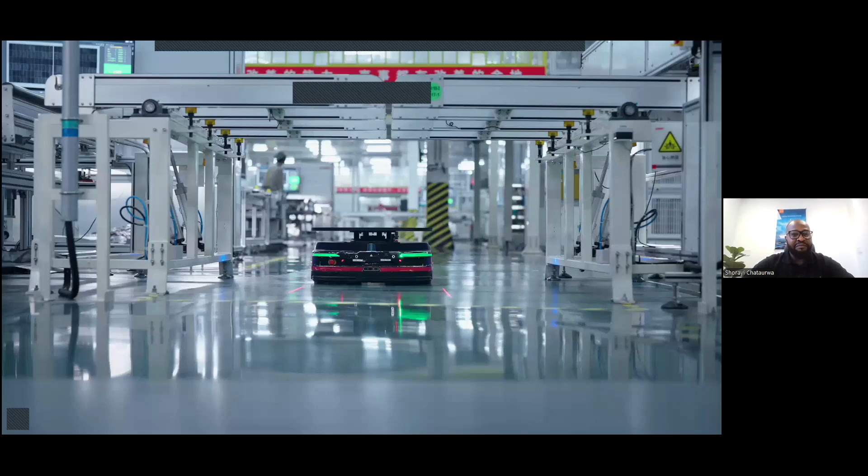Then the third one is one of our flagship technologies: we introduced what we call the TaiRay wafer. Now we're going deeper into the technical and technology development which we have deployed from the LONGi side. So the TaiRay wafer is a silicon wafer which we have developed throughout the last 10 years, and it has a lot of advantages. That is better matching.

I'm going to explain further. Then also high concentration, I'll explain. Then also lower impurities and more impact resistance. So let's dive into better matching. So better matching is actually just the cell adopting the optimum resistance.

That is the material which actually made the cell itself. So if you look at the graph which I've put in front of you, you can see the comparison between the conventional wafer and also the TaiRay wafer. So it does have a better matching of bulk resistance compared to the conventional.

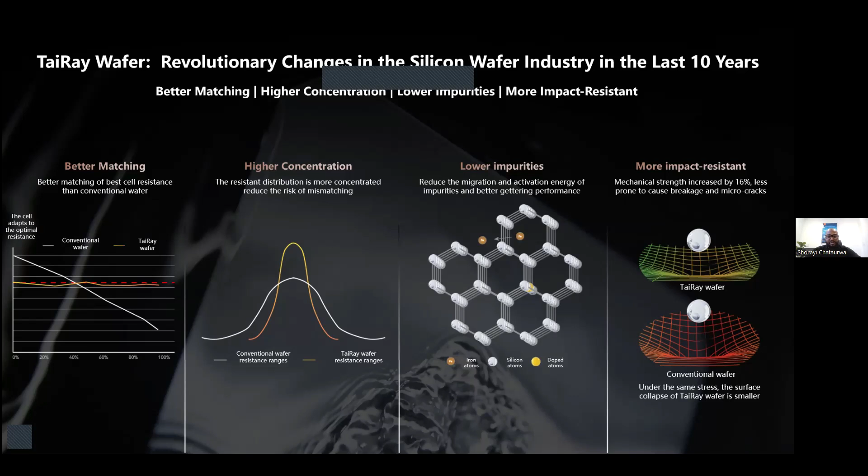Then with regards to the low impurities, during the manufacturing, we actually looked at the doped atoms and also silicon atoms, then also the iron atoms. So we gelled together to make sure that we reduce the migration and activation energy of impurities and better gettering performance of the cell itself.

Then the last one, which is very important, is more impact resistance. Actually, we strengthened the wafer. So our wafer is stronger. It actually increases mechanical strength by 16%, which is less prone to cause breakages and also micro cracks during transportation, during installation, and also during just merely handling of modules.

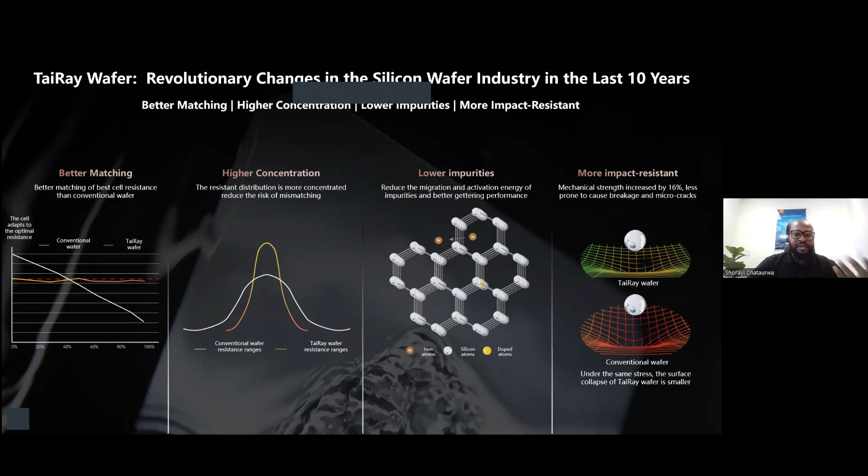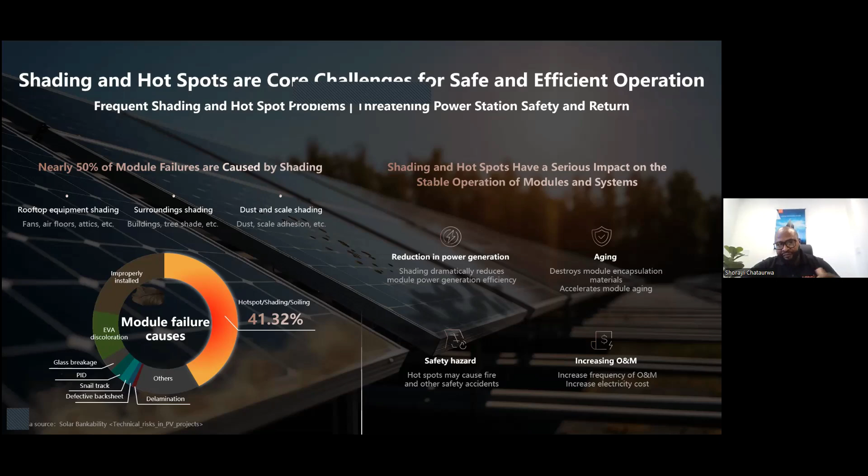So we looked at the frequency of shading and hotspot problems, which actually threaten power station safety and return on investment. During our research, we found out that nearly 50% of module failures are caused by shading. So shading can be from rooftop equipment, that is your fans and also air floors and attics, etc. Then the second one, surrounding shading, which is your buildings, your tree shading, etc. Then we have dust and also scale shading, which is dust and, for example, soiling.

So after we looked at that, then we looked at the distribution in terms of module failure cause. You find out that the large chunk of the problems is hotspots, shading and soiling of the modules. So we came and said, okay, let's look at it. Then we also looked at other parameters, for example, your delamination, your defective backsheet, snail trails, PID, glass, and also EVA discoloration. And we also looked beyond at other impacts, like, for example, improperly installed modules.

So after putting everything together, that's where we came up with the solution, and we came up with a product, that is your Hi-MO X10, which can solve all these issues, which does have an advantage over most of the products you find on the market at present.

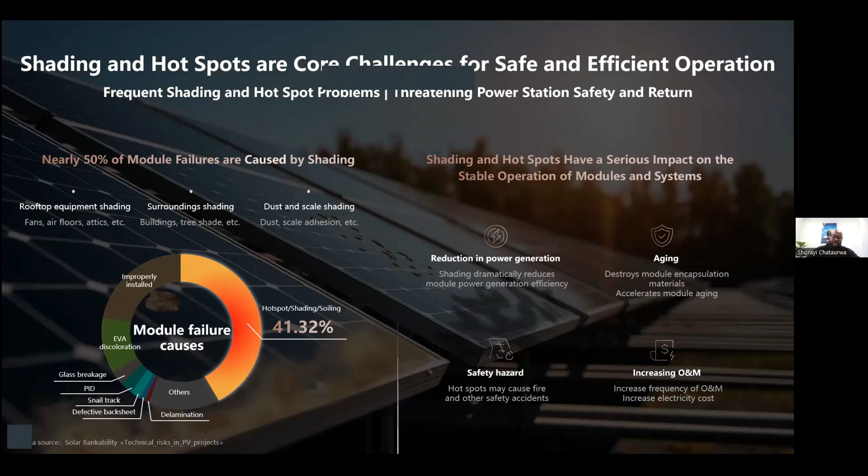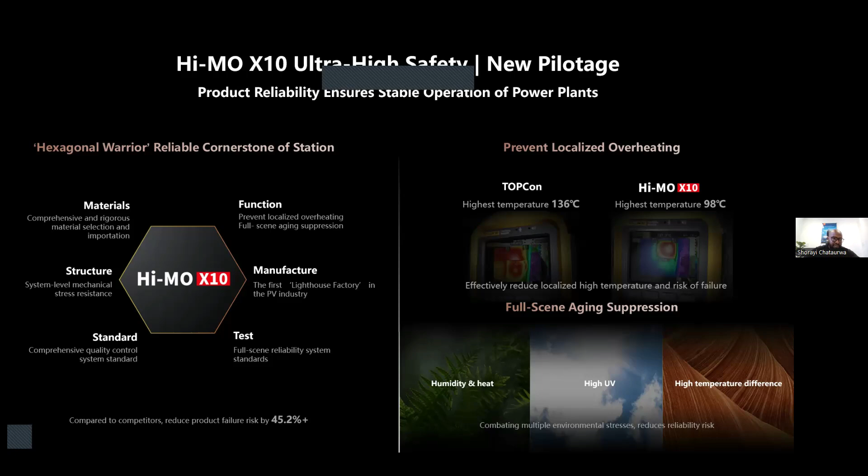So Hi-MO X10, let's look at the safety of it, as ultra high. Yeah, so as I just mentioned, why we came up with the product and the advantages of this product. So I've got the cornerstone, what we've looked at as the hexagonal warrior in the industry as the Hi-MO X10. So we looked at the material. I just spoke about this briefly. We looked at the material that we have deployed in the product, that is a comprehensive and rigorous material selection and importation. Then we looked at also the structure of the cell and the structure of the module as well,

complying with the system level mechanical stress resistance and the standard, which is comprehensive quality control system standard. Then in terms of functionality, I've got two items, which are very important for this product, that is preventing localized overheating. Then the second one is full scene aging suppression, which I'm going to also talk about. And manufacturing also, I've spoken about the Lighthouse factory, which is incorporated with AI to avoid human error. Then the last one is the test. So we actually deploy a full scene reliability system, standard testing.

So if you compare now these two competitors, you can see that we have reduced failure risk by 45.2% when we introduced the Hi-MO X10. So I've put some scenario on your right screen, that is preventing localized overheating, because I know people will have some questions on that. So we did a comparison with TOPCon using thermal imaging. So you can see we've got the highest temperature of 136 degrees. That is when the module is in operation. And if you look at the Hi-MO X10, the highest temperature could reach around 98 degrees Celsius. So this effectively reduced the localization of high temperature and the risk of failure.

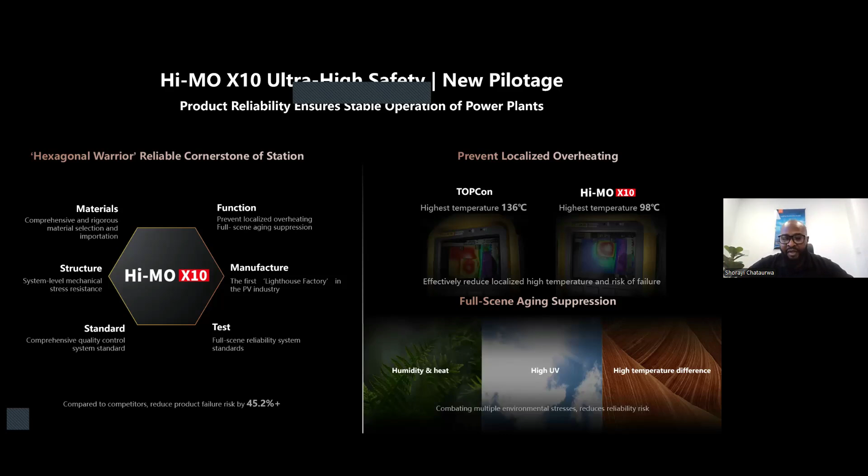Then the second one on the function, that is your full scene aging suppression. So our module, the Hi-MO X10, can actually withstand scenarios whereby you have humidity and heat. Some call it anti-humidity and heat products, and also we have high UV, so the module can actually resist an ultraviolet environment and also high temperature difference. So this actually combats the multiple environment stresses, which reduces the reliability risk on your plant or on your system.

Okay, some people ask me, what is this HPBC 2.0? So HPBC 2.0 stands for hybrid passivation back contact 2.0. The previous product we had was HPBC 1.0, which was made of a P-type cell. But now HPBC 2.0 is made of N-type wafer with the core of the TaiRay wafer. So this makes three key technologies. That is your BC platform plus bipolar hybrid passivation. I know many people are going to ask about bipolar hybrid passivation. I'm going to try to explain it in a nutshell. Then also we have the TaiRay wafer core. I deliberately started with the TaiRay core because it forms the core of the product. And we have also what we call the zero BB structure.

So in terms of these three leaps, we have the leap of cell technology barrier. So we upgraded the three-layer structure of the light absorption and also improved the photovoltaic conversion, then also electric transmission when we moved the bus bar to the back contact, and we leave the front exposed for high absorption of light. Then we've got also the leap of silicon substrate limitation. This is where we equipped with the TaiRay wafer core, which gives an enhancement of overall power generation potential and reliability.

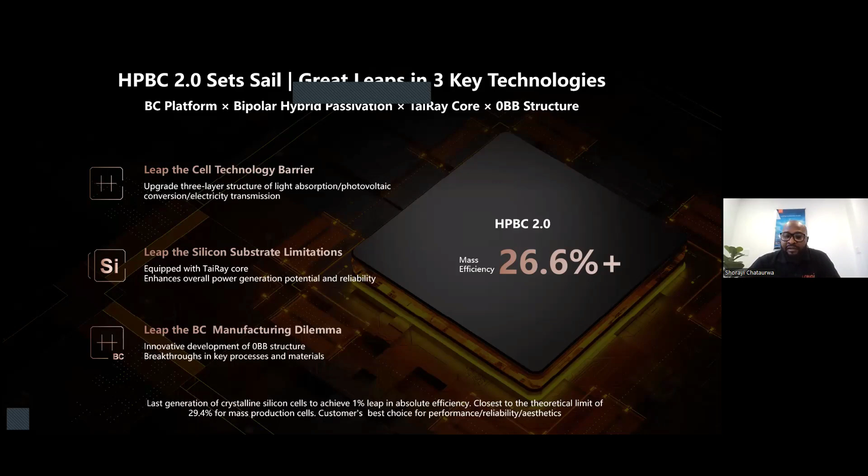That is your last generation of crystalline silicon cell to achieve 1% leap in absolute efficiency. It's actually closest to the theoretical limit of 29.4 for mass production cell. So I think this is just a good choice for the customer, best choice for performance, reliability, and also aesthetics. Because if you look at our product in terms of the looks, it looks beautiful. It's aesthetically pleasing.

Then the next section, I'm just going to try to break it down a little bit in terms of the self-developed bipolar hybrid passivation. So when we introduced the hybrid passivation, actually we've seen a boost of VOC, and also uniform passivation actually reduces aging risk, which I also mentioned in my previous slide.

So bipolar, it comes from the busbar. So when we moved the busbar connection from the front to the back of the cell, we have the positive electrodes, then we have also the negative electrodes. So the previous modules, we used to have one passivation layer on one electrode. So now what we have done, we've introduced a double. So for the positive and negative, we've introduced passivation on both.

So when we did an experiment, we found out that the passivation uniformity is 2% ahead of the mainstream product, which is actually effective against the UV for the cells. Then we have also the advantage that the passivation also reduces current loss at both positive and negative electrodes. So by placing both, that's where the name came as bipolar. So bipolar hybrid passivation, that's where it came from.

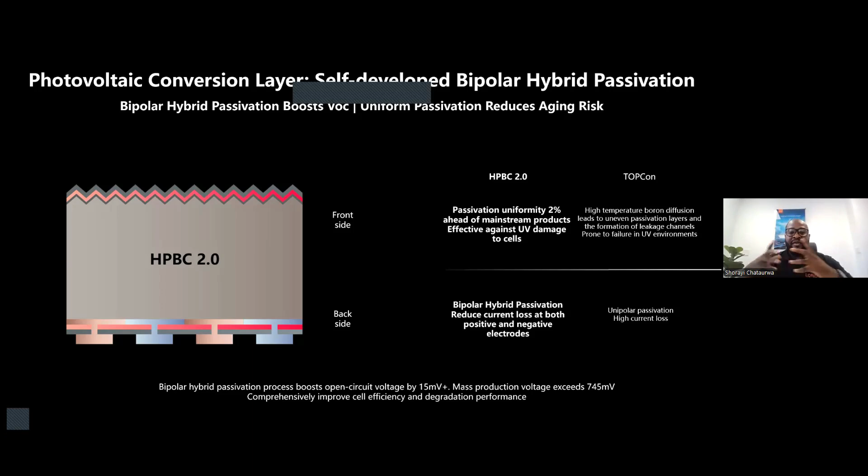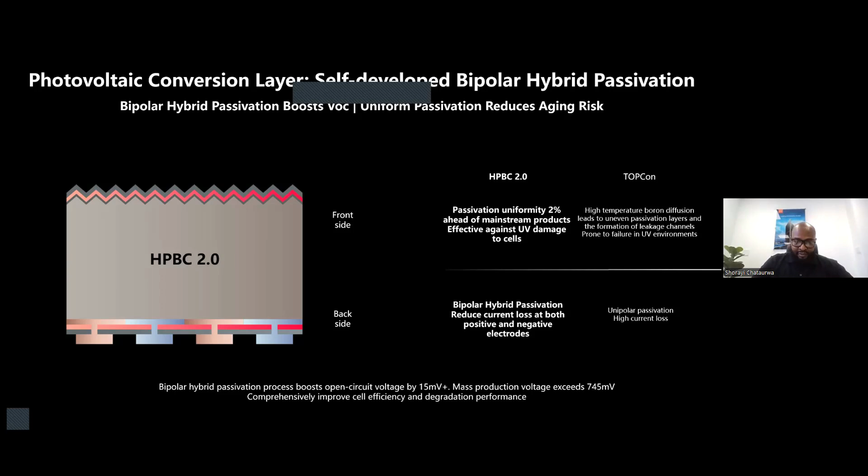So in a nutshell, the bipolar hybrid passivation process boosts open circuit voltage by 15 millivolts plus, and in terms of mass production, voltage exceeds 745 millivolts, which comprehensively improves the cell efficiency and degradation performance on these PV cells, which also produce the X10.

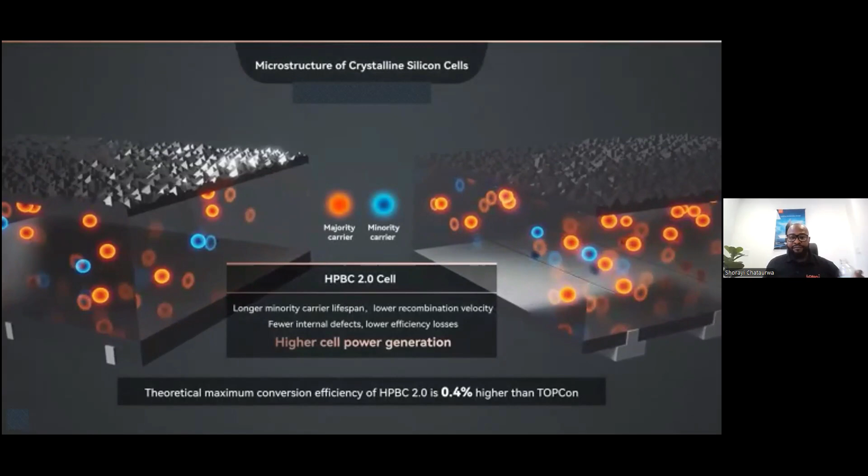So I've got a video here just to demonstrate the substrate advantages, which I'm going to talk about, which is a comparison between TOPCon and the module. As you can see, there's a greater advantage in terms of these modules. So I have already broken it down so that people can understand exactly what we speak about.

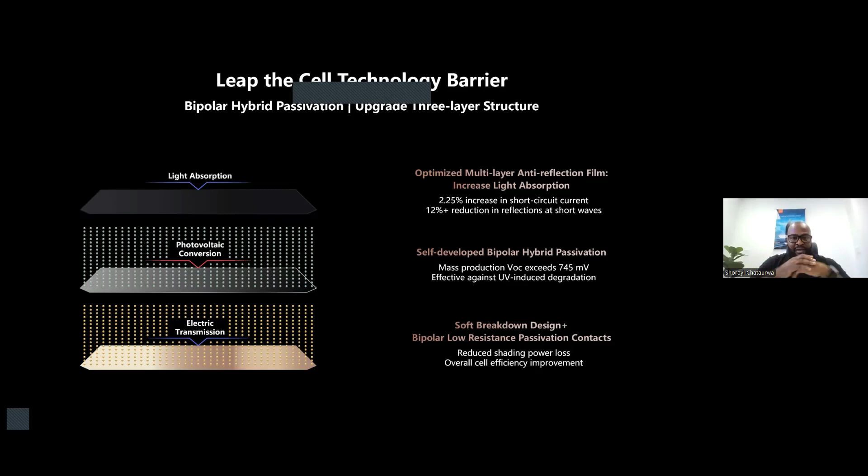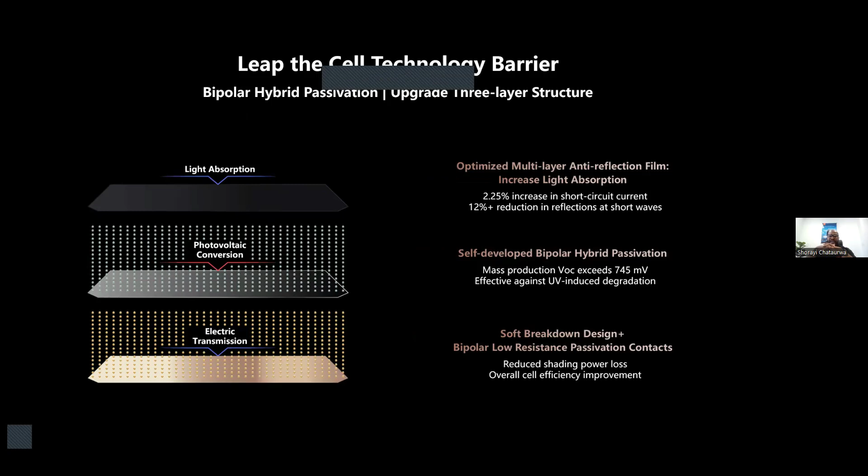So this is an exploded view of the cell itself. So if you look at the front of the cell, there's no busbar at all. Then if you look at the middle, we have also the passivation, which actually improves your photovoltaic conversion. Then also the backside, which actually improves your transmission. So we optimized by multiple layers by putting also an anti-reflecting film, which actually increased the light absorption, and I've put the numbers there, which were also tested by third parties.

That is 2.25 increase in short circuit current and 12% plus reduction in reflection at short waves, because you can see there's no reflection, the front is clean of busbars. But then also the self-developed bipolar hybrid passivation. I mentioned also mass production VOC increased, effective against UV induced degradation.

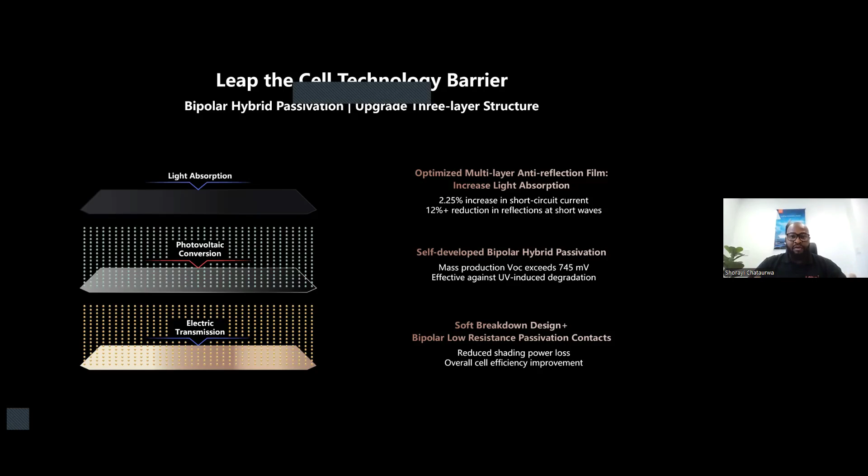Then we have what we call the soft breakdown design plus the bipolar low resistance passivation contact, which actually reduces shading power loss. Overall cell efficiency also improved on these cells of ours. Then the most important advantage of our product as well.

I think many people have seen adverts in terms of the anti-shading, and some ask questions, what is this anti-shading? So our modules, we have deployed an anti-shading feature to actually curb the issue which I just mentioned. When you install your modules, there's a lot of issues. For example, equipment shading, leaf shading, also dust shading, snow shading.

So if you look at the Hi-MO X10, if there's one cell shaded, it won't affect the whole string, compared to the conventional module on the side. So single cell shading leads to self bypass. So there's no effect to the power output of the entire string of cells.

So less power loss. And if you compare now to the conventional module, the moment you block one cell, whether it's a leaf or bird droppings, you will have the whole entire string affected. So single cell shading leads to the entire string of cells to bypass. That is your large power loss. So in the case of one cell shading, in a nutshell, the power loss is 70% less than that of the TOPCon modules.

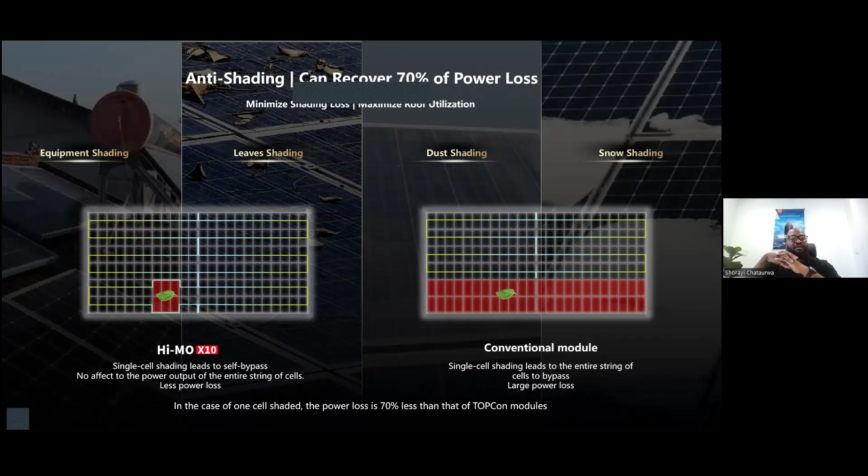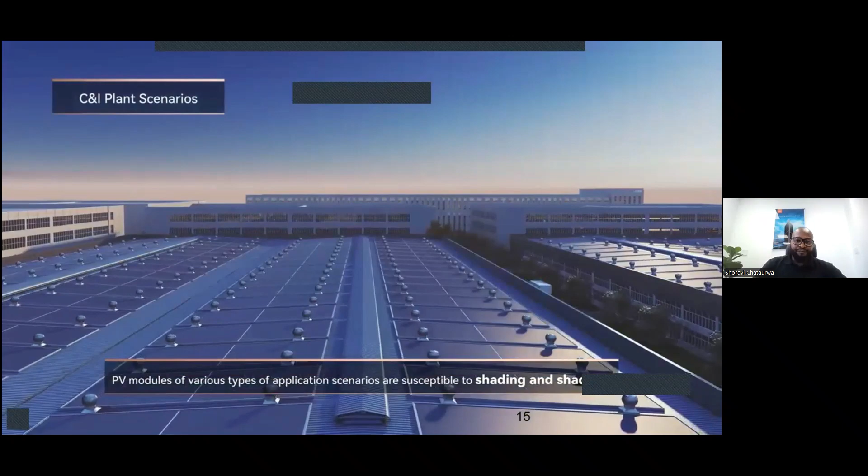So this is just a video which I've also done as a demonstration, just to showcase this phenomenon. So TOPCon versus HPBC 2.0, that is your Hi-MO X10. If you look at the TOPCon, you find out that if there's any leaf dropping, it's just self-explanatory. There's a 35% reduction in module power generation efficiency after one piece of this cell is shaded.

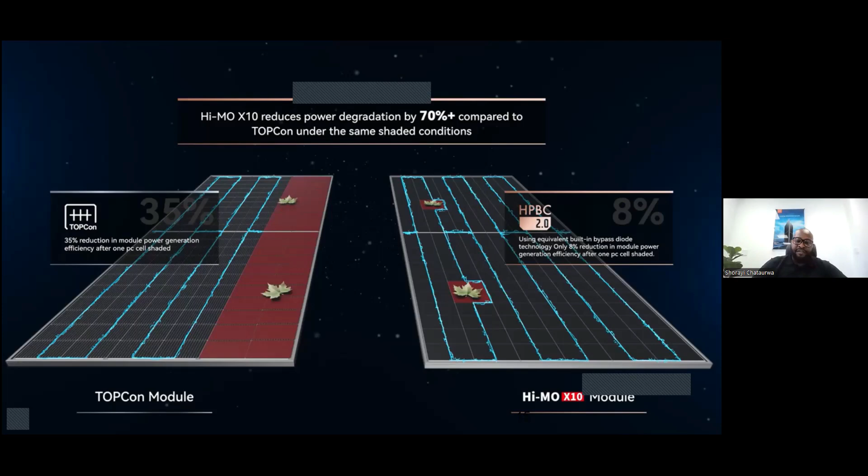And if you look at the HPBC 2.0, that is your Hi-MO X10, using equivalent built-in bypass diode technology, only 8% reduction in module power generation efficiency after one piece is shaded. So Hi-MO X10 has got a higher advantage in terms of the comparison between the two.

So this is just also to look at the safety of the module. I've spoken about preventing localized overheating, which actually eliminates fire hazards. So the design which I just mentioned, also the innovative soft breakdown design. Actually, it's like you're buying fire insurance for your roof, because even if the probability is 1 in 10,000, once a fire occurs, the power station will suffer huge losses.

So the innovative soft breakdown function of Hi-MO X10 is equivalent to buying, for example, 30-year fire insurance for your rooftop power station. So this is just a comparison. If you look at the Hi-MO X10 and also TOPCon, that is the difference here.

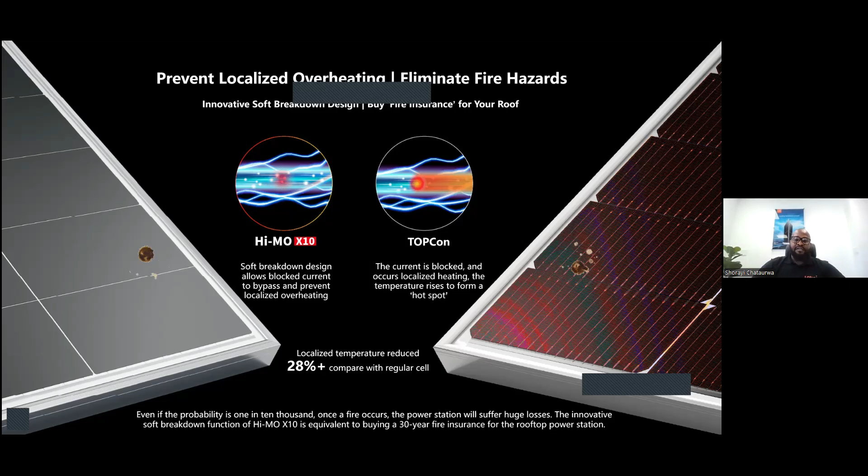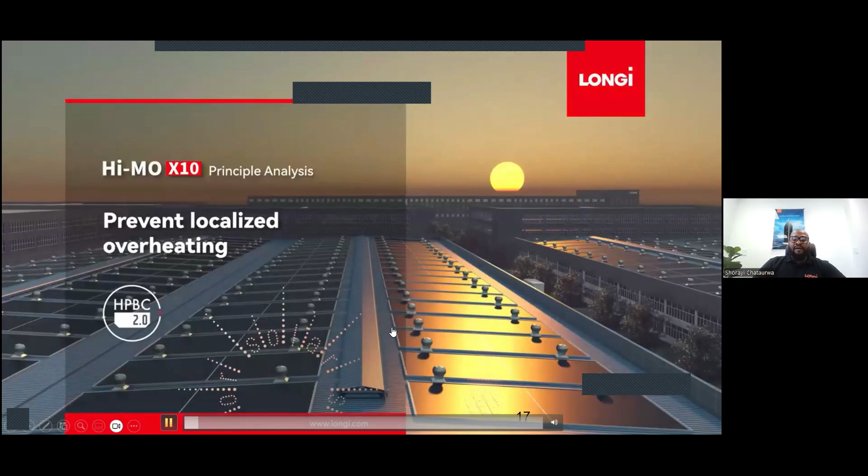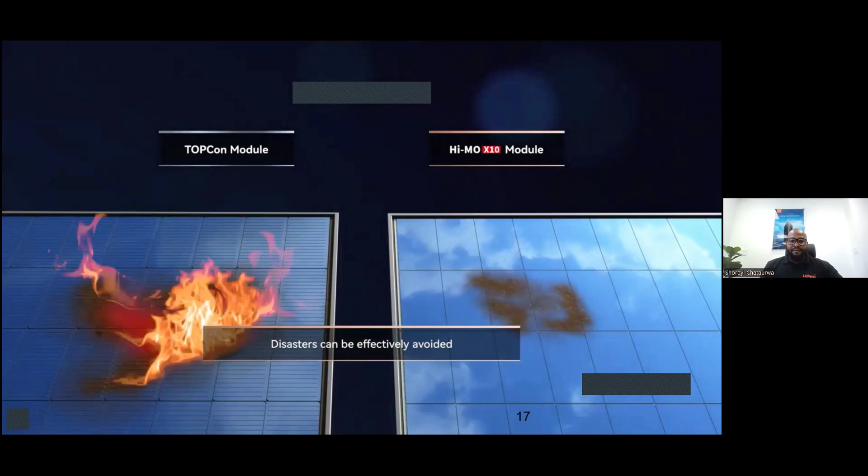So this is also a demonstration as to HPBC 2.0. It's just some short videos which I can also share with the attendees in comparison, just to highlight this built-in bypass diode. So disaster can be effectively avoided when you compare the two.

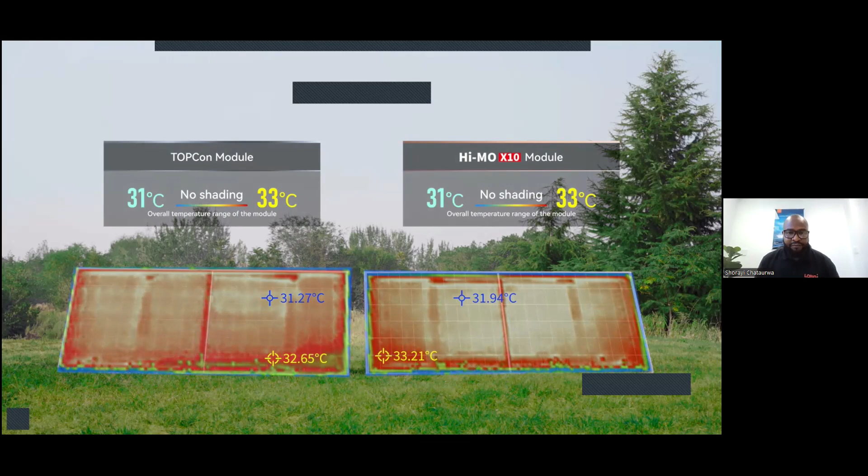Then the localization of heat, you can see this is the difference when it comes to localization of heat. So this is the comparison between the conventional module and the Hi-MO X10. This is your TOPCon and Hamo X10 module, and you can see after blocking, you can see the temperature difference.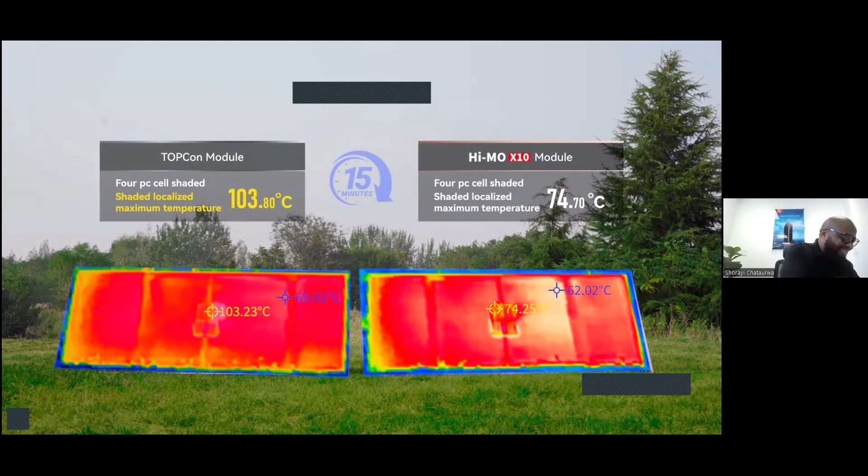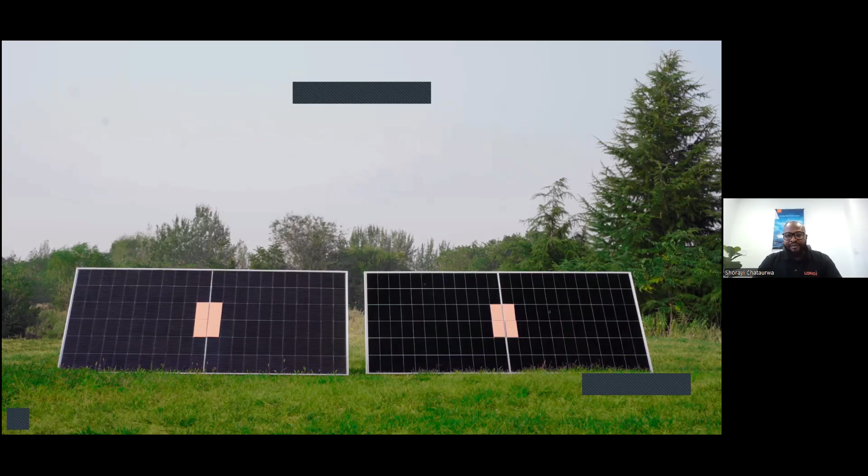All right. I think the comparison is actually self-explanatory. You can actually see that the Hi-MO X10 has got advantages. Because of time, I think I'm going to move a little bit faster. So this is the product range of our Hi-MO X10. So this is the first choice for high-value modules in the global DG market. So we've got three lines. I'm just going to go through all the products we have.

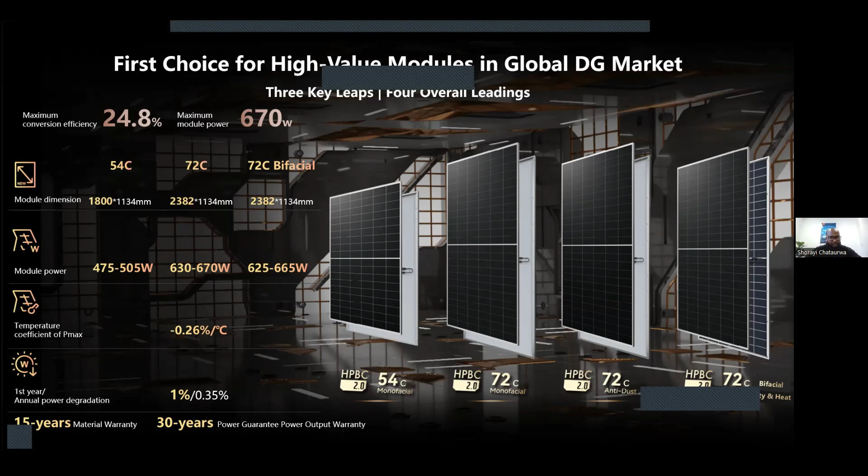So in terms of the maximum conversion efficiency, we are looking at 24.8%, and the maximum module power is 670 watt peak. So across the range, we've got 54 cell, which comes with a dimension of 1.8 by 1.134 meters. In terms of the power range, the power bin, we're looking at 475 to 505 watt peak.

Then in terms of the 72 cell module, it comes as standard. We've got 2.382 by 1.134 in terms of the dimension. The power bin is between 630 to 670 watt peak. Then we have the 72 bifacial, which also has the same dimension as the monofacial, but with a different peak in terms of the module power, which is 625 and 665 watt peak.

Temperature coefficient, you can see our temperature coefficient plays a very significant role. It's sitting at minus 0.26% per degree Celsius, and annual power degradation is 1%. And from the second year going to the 30th year, it will be 0.35%. Then we look at the 15-year warranty. That also includes your manufacturing workmanship. Then we have also a 30-year power output warranty.

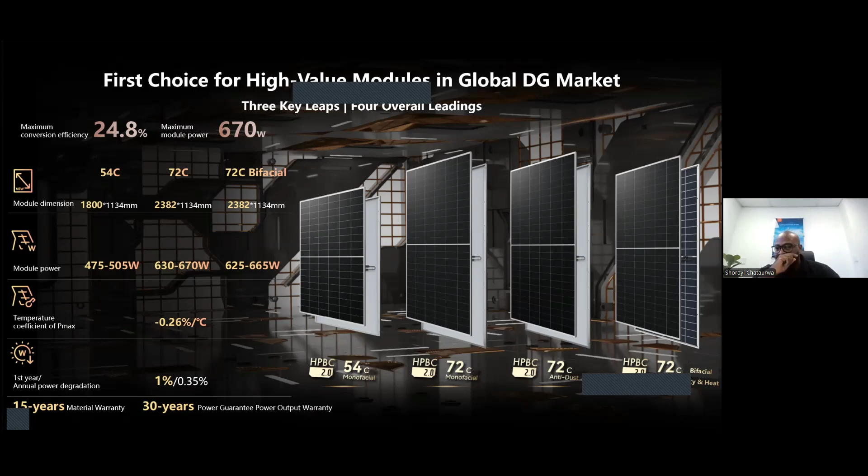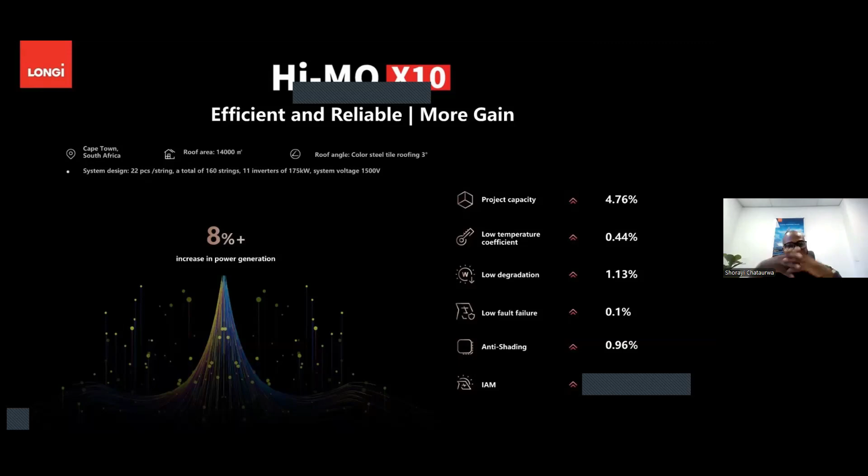Then the next one is the simulation which we have done here in Cape Town, South Africa, with a roof area of 14,000 square meters with an angle roof of 3 degrees. So the system design was 22 pieces per string and a total of 160 strings. So we used 11 inverters of 175 kilowatt system. And as you know, our modules are high voltage. So the system voltage was sitting at 1,500 volts.